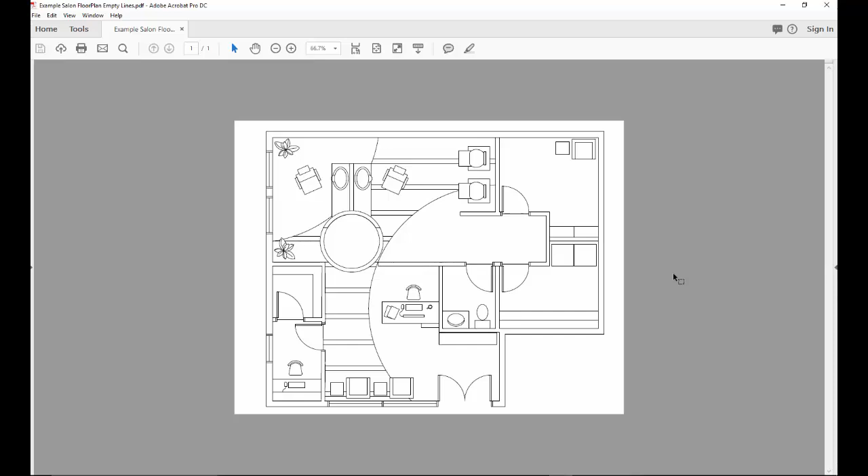Don't include any room names in this floor plan. We're going to do that using the text command in Photoshop. So basically you want something very similar to this, very blank but still with lots of information and accessories and everything I just talked about earlier.

Now step 2 is going to be to go ahead and open this up in Photoshop. So I'm going to click exit here, and here I'm in Photoshop already. So I go to File, Open, find the PDF that I want to open, and click Open. And in this box, the only thing I want to make sure is where it says Crop To under the page options, that it is selected to Media Box. I think it defaults to Bounding Box.

And what Bounding Box does is it crops right next to the line work. So there's no space outside of the floor plan, and we actually want to have a little bit of space out there. So we're just going to go ahead and use Media Box and hit OK. Now if your Photoshop is like my Photoshop, for whatever reason it decides to rotate the image. It's so annoying. So how I fix this is I'm going to go up to Image, Image Rotation, and in this particular instance I just need to do a 90-degree counterclockwise rotation. And what's nice is that it will rotate the canvas as well as the image.

Now you're probably thinking to yourself, well, what the heck is going on? This is really crazy. Why is there black and white checkered happening on my screen? So that means that the background is transparent. Anytime that you bring in a PDF into Photoshop, it's pretty much going to do this. But I do want to point out that over in the Layers panel, this is the only layer here. It actually consists of all the line work. So I'm going to go ahead and rename that Floor Plan Outline. You can name it Floor Plan Line Work, whatever works for you. That's just going to help me remember this.

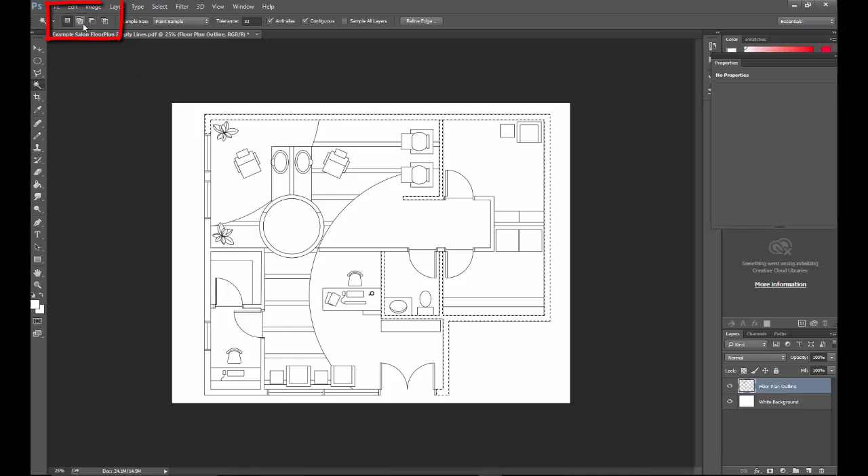And I can add selections by holding Shift while I click. You can also come up here to the very top in the options bar and select the little button that says add to selection, but I'm a Shift clicker, so that's the way I'm going to do it. So hold Shift, click inside. Now for some reason I accidentally click on a line. Let's see if I can get it to do it. It's going to kind of think and then all of a sudden it hits everything. I don't want that, so just hit Control Z if that happens and you're still right back to where you were.

Just make sure that you hit every single interior wall, and I know that I got a little guy right here that I gotta get, and these are walls right here. Here's a wall, and that's a wall. Just double checking, making sure I got all the walls selected. Oh, there's a little guy right there. I think we're looking good.

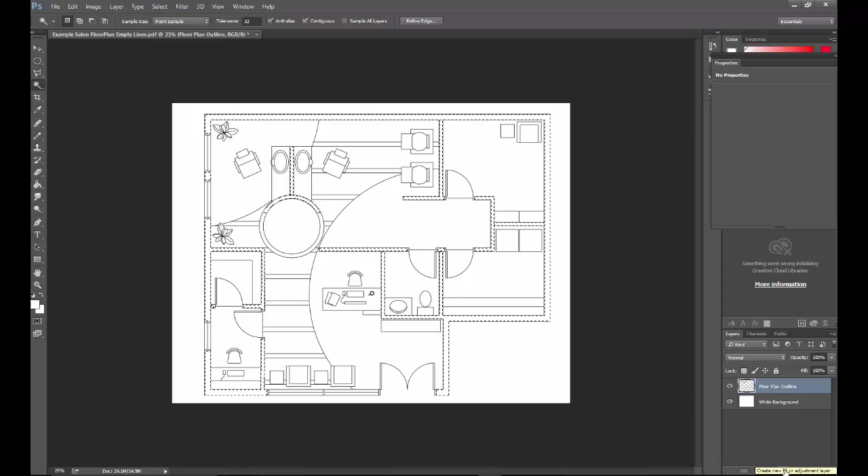Now once all the inside of the walls are highlighted with marching ants, I'm going to come down to this little button over in the layers panel. To me it looks like a chocolate dipped cookie, Oreo cookie or something like that. I usually call it the Oreo. But this is the new adjustment layer, and what I want to do is I want to click on that and I want to go to where it says solid color. It's going to bring the color picker up, and I want black. And I know it's going to be fully black if the RGB formula is all zeros.

Click OK, and you'll notice it previewed it for me while I was in there, but now you can see that it has actually filled all the walls with black. Now you can do that with AutoCAD automatically, but in case you forget to do that, you can still do it in Photoshop. Now notice that over in your layers panel, it gave me a new layer and it says Color Fill 1. There's two icons.

The first one is the color thumbnail, and so that, if I double click inside of it, will allow me to go back and change the color of my walls if I want to, like blue. But really I do want them to be black, so this was just demonstration. So again, 0 0 0 for the RGB formula. Click OK. The other one is actually the layer mask, so it's showing you how the adjustment layer is hiding parts of things and filling the other parts. So we'll come back to this area here in just a little bit.

I do want to rename this adjustment layer. I'm going to call it the wall fill. Again, if you aren't labeling your layers, you're going to be in a world of hurt here in a little bit when you've got like 1,500 layers going on. So make sure you're labeling all your layers, please.

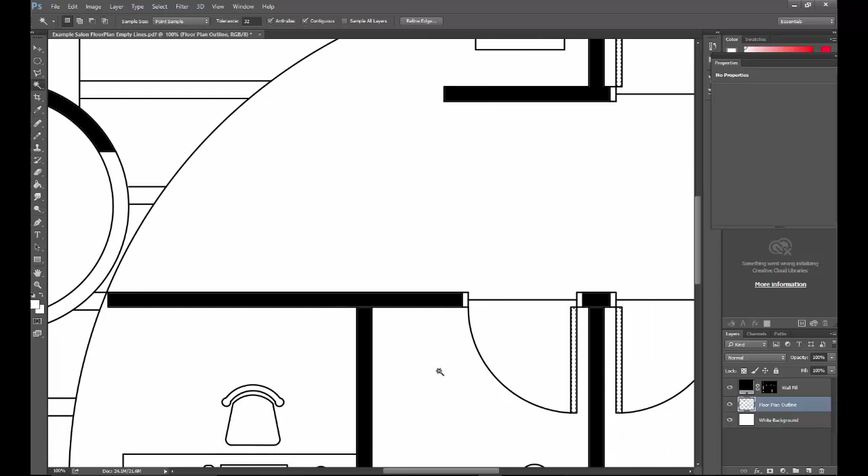Come down here to the entrance doors. Now you could choose brown, you could choose black, you could do different colors for doors. You just have to do different layer adjustments for them. And then I think I just have these two doors left. There we go. I'm going to zoom out just to double check and make sure that I got all of the door thicknesses. It looks like I did.

I'm going to hit the adjustment layer, solid color. I'm going to make sure black is chosen and that we've got 3 zeros. Hit OK. And all of my doors are now black. I have to repeat this one more time for the frames, and well, actually 2 more times. I have the frames and then I also have windows.

Now when you do windows, you don't want to do those black because you need to be able to see that there's windows. I suggest doing it whatever color that the sill of those windows are going to be. So sometimes they're cream, sometimes they're silver for metal. Sometimes I like to pick like a light blue just because psychologically we consider blue like glass. So I usually do like a bluish gray.

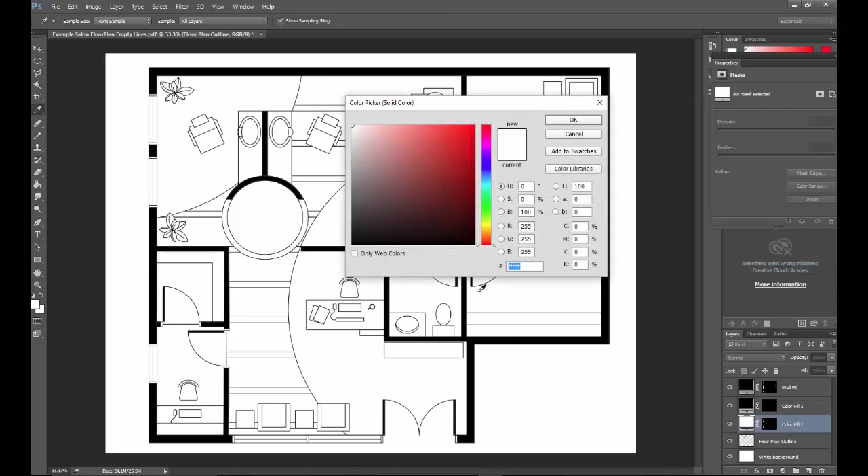So again, floor plan outline needs to be highlighted in layers. Magic wand, Ooh Ah Pixie Dust. Let's do the windows first. I'm holding shift while I'm selecting both sides of the window. And I don't have many windows in this particular one. Then it's time for the adjustment layer, solid color. And this time I'm going to pick kind of a dusty blue kind of color. Whoa. There we go, something like that. And now I have my windows, slightly blue.

Oh, I haven't been naming my layers. Shame upon me. Shame, shame. So I'm going to name this window fill. And this one above was the door fill. There we go.

And then last but not least, I want to make sure that I get the frames done, and I'm going to do those a darker gray. So again, floor plan outline highlighted. Take the magic wand, and then I have to go through all of these with my Ooh Ah Pixie Dust Magic Wand and highlight all of these.

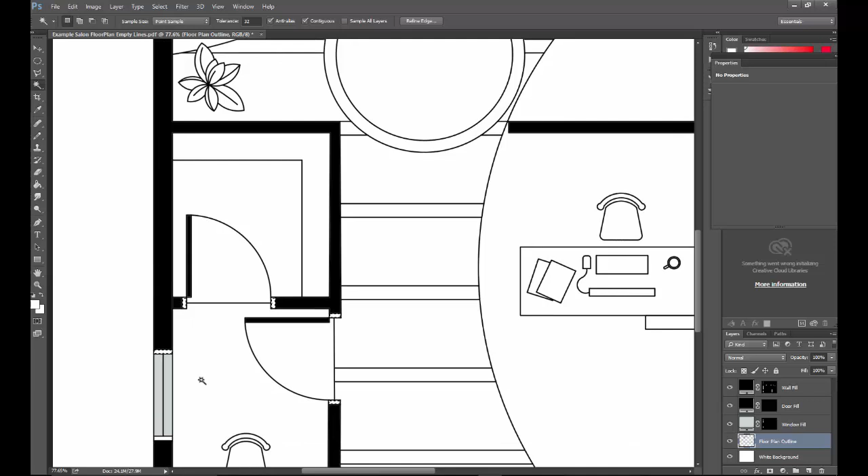It is my philosophy that there should never be an empty, blank, white anything on your floor plans. The reason why is because it makes it look unfinished, and clients don't like to see anything unfinished because then they're going to think that you aren't going to finish things. So everything you draw and everything you touch reflects back on you. So as a designer, you want to make sure that things look finished and polished at all times, and never leave anything white or blank. Even toilets get color. Even if they're white, they still get color.

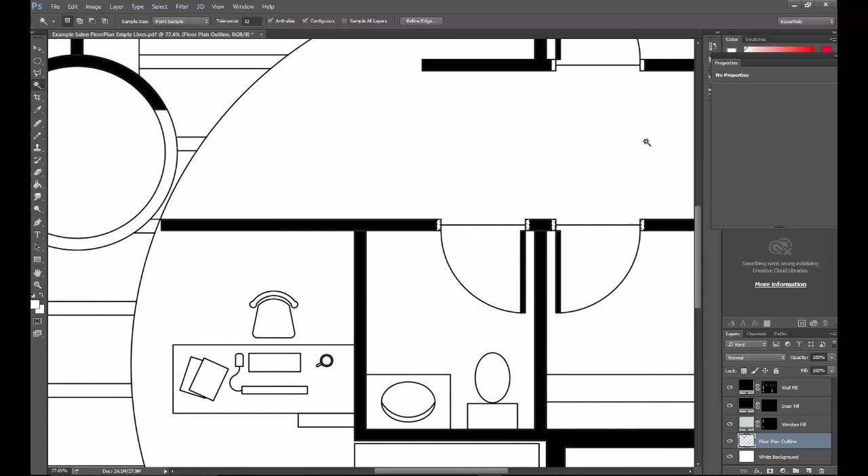So up here in the frame, la la la. Okay, I'm pretty sure I got all of the frames. I hit the Oreo cookie, go up to solid color. I'm going to do a darker gray, so something kind of a little bit more like this. I still want to be able to see it in my floor plan, and I just kind of have to play around. Well, that looks pretty good. I can still kind of differentiate between the frame, the wall, and the window.

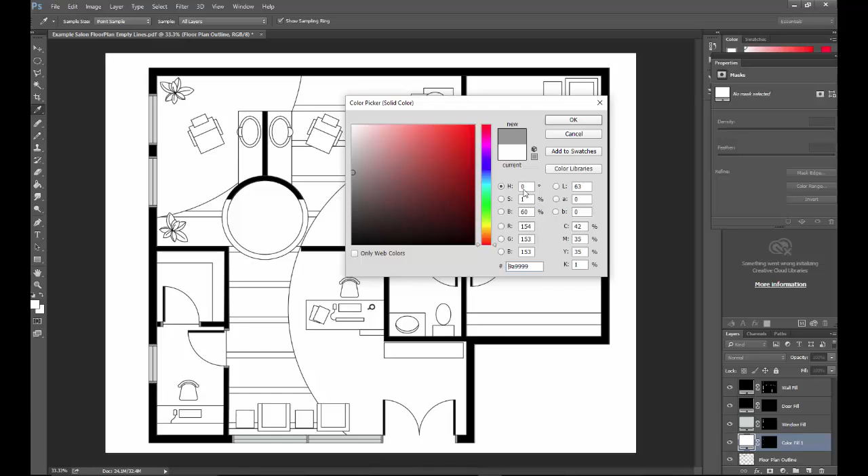Click OK. Come down here to my layer. I'm not going to forget this time. And type in frame fill. Hit enter, and we're looking good.

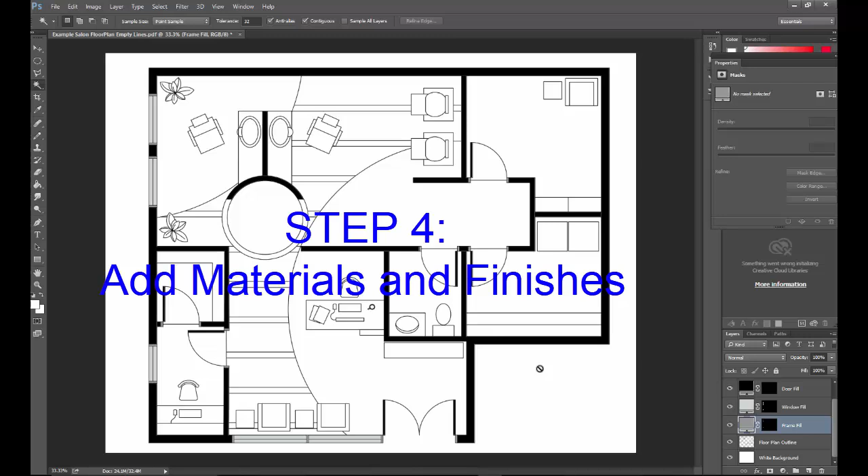So believe it or not, we are already at step 4, and this is where we're going to make finish and material patterns for flooring, furniture, and all the accessories. So the first thing that I'm going to need to do is I'm going to need to find some materials that I can turn into a pattern. So I'm going to go to Google.

Come on Google, let's go, there we go. And I'm going to type tileable white marble. Let's go with that first. Tileable, what does that mean? Well, I think with marble I'm probably not going to find a tileable image.

I'm going to go here to the images and let me explain tileable. So Photoshop is going to take a picture and it's going to multiply it. It's going to repeat it several times in order to fill in like we just did with the color. It's just going to do it with a pattern. So if I can find a tileable image, that's going to repeat over and over again, but it's going to transition smoothly between the repeated patterns.

If I don't have a tileable image, that's when you start getting things that look staggered or squared and a little awkward. It doesn't look as realistic. And my other philosophy is we want this to look as realistic as possible. So here you can see lots of images of white marble. And I'm going to click on one. Let's see, let's try this one. I just want to show you.

So here's a watermark. That means that this image is owned by this company and the watermark is permanently on there. Now could we take a clone tool and actually manipulate the picture so that we can get rid of it? Yes, I suppose we could, but that's kind of a jerk move, and actually it's kind of illegal. It's called plagiarism, and we don't go for plagiarism around here. So you can never choose an image that has a watermark on it. You have to find images that don't have those.

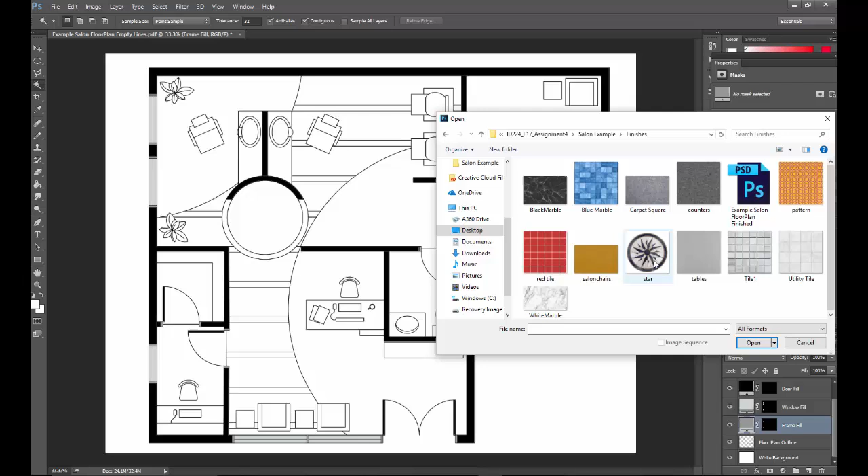And you save it as a JPEG image, and I usually rename them because they have these really long names on some of these JPEGs you find online. So I'm gonna hit cancel. You don't hit cancel, you should hit save if you find a white marble that you like. And I'm gonna minimize Google here for a second. And basically what we have to do is open up that image in Photoshop. So I'm going to go to the finishes, I'm going to open up the white marble, I'm going to click open, and here's the image.

I need to make this a pattern. So I'm going to go up to Edit, Define Pattern. Photoshop's going to be, hey, what do you want to name this? I usually keep it the same name that I named it in the File Explorer. Click OK. And it looks like nothing happened, but actually Photoshop has now saved that as a pattern in its own memory. And once you click OK, you can know that the job was done.

We no longer need this image, so I'm actually going to exit out up here and go back to the floor plan. And I'm going to do the exact same thing that I did before with the walls, windows, doors. I'm going to make sure that floor plan outline is highlighted. I'm going to use my magic wand on all the areas that I want that white marble to show up on. I'm using Shift to select multiple areas. There we go, and I'm just double checking, making sure that I got everything that I wanted to.

And once I do, I go to the Oreo cookie. This time, instead of doing solid color, I'm going to do pattern. And what's kind of cool is Photoshop automatically opens this little window with the very last pattern that you created. Now, as you can see in this picture, it went ahead and inserted the marble, and it looks beautiful at 100% scale. Notice that I can change the scale, so if I want it to be more like 50%, I could.

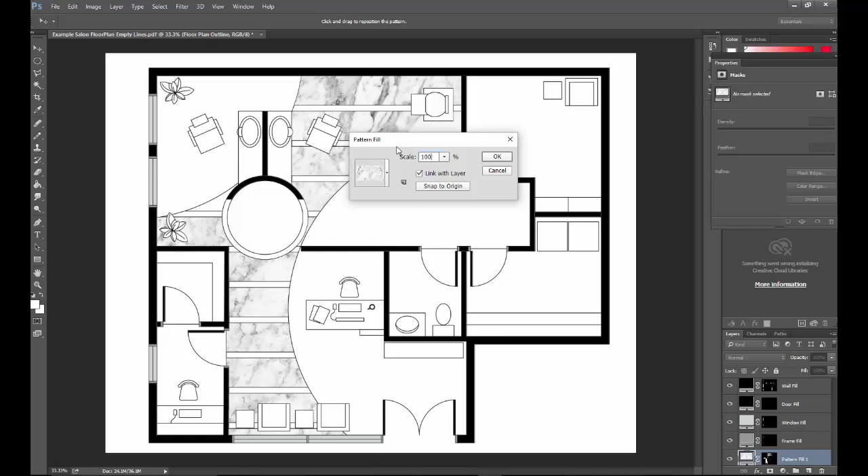And I noticed that I actually missed something, so I'm going to hit cancel real quick. And I'm going to hit shift and add it to. It's really important to make sure that you get everything that you wanted the first time. Otherwise you have to delete the layer and then come back and highlight everything with the magic wand again. So again, Oreo cookie pattern scaled to 100%. That looks beautiful. I'm going to click OK.

So now I have added marble tile to my floor. Pretty groovy, right? Now, just like the solid color, I can come back and double click on this little color icon right here, and I can choose any pattern that I've already made. Now, Photoshop does come with some pre-chosen, but as I start making patterns, you can see that it starts loading into this library. So in fact, if I wanted it to be a different pattern, I could click here, and this might be a really good opportunity to see.

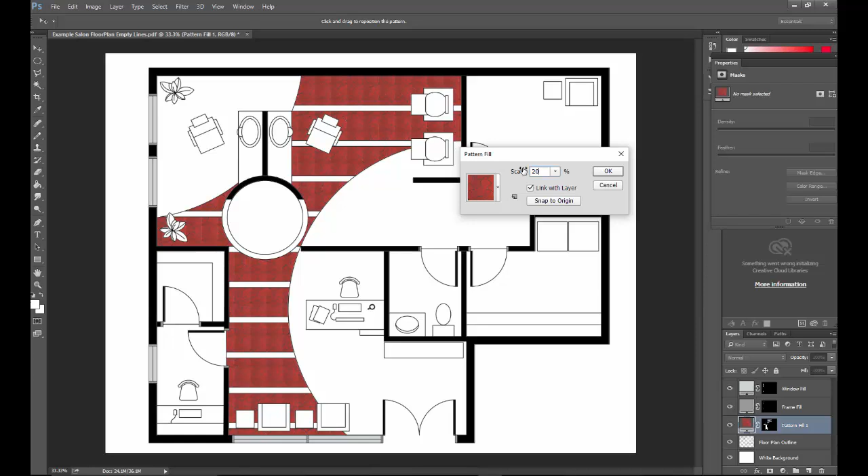This is a scalable tile pattern that I picked. However, you can see that the area that highlights does not match the area with lowlights, and so I get this weird gridded pattern. And I'm gonna make this go down 20%, and here you can see where we're getting like a very definite understanding of what's going on here. The checkered pattern look does not look so realistic. And so I try to avoid images that might have highlights or lowlights in them, or patterns that don't match up to each other, because it does this very same thing that we're looking at right here.

So I'm going to go back to my white marble pattern. Actually, it was this one at 100% because I like that one. And I'm going to click OK. So again, just to demonstrate that one more time, let's put some tile here and here. I've already got the tile uploaded, saved as a pattern, so I'm going to make sure that floor plan outline is highlighted, grab that magic wand tool, and making sure that my marching ants go around everything that I want to. Notice how it's not including the plant or the chair or anything else.

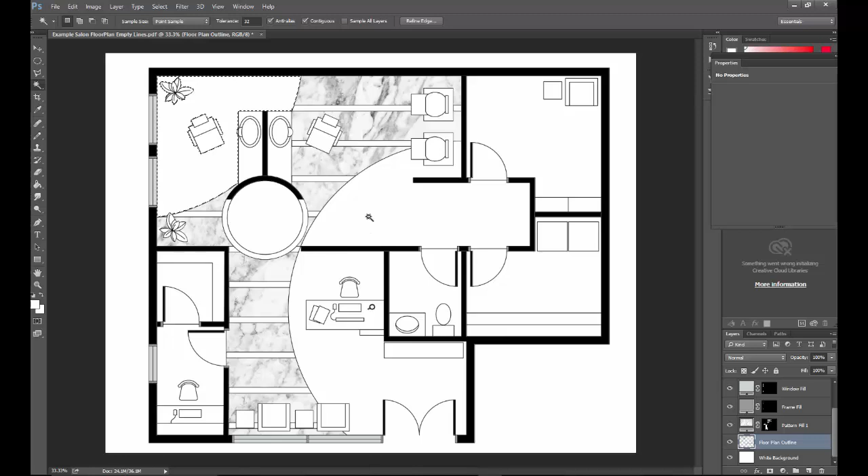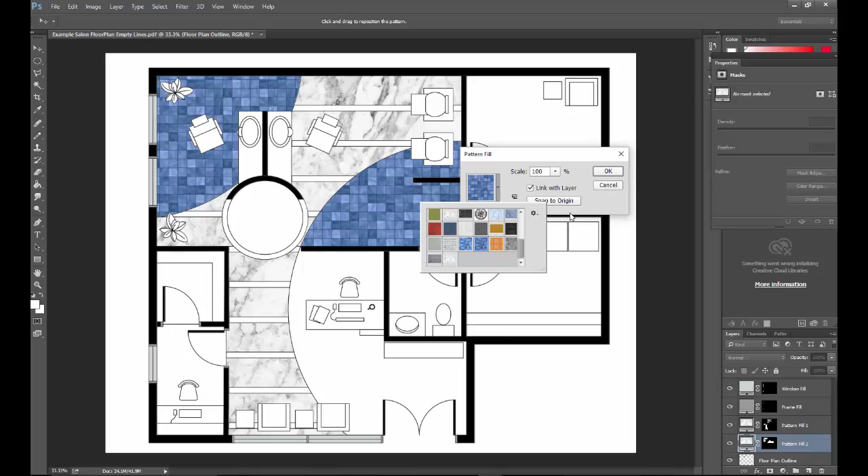Hit shift because I want the same floor material over here. Oreo cookie that stuff, pattern it, and I could do that, but I'm actually going to go and change it to this one right here. I kind of like that look of this very modern, sleek looking thing next to some blue tiles that I found. And maybe I just want to shrink that just a little bit and hit OK.

So continue doing this for the entire floor plan. Again, make sure that everything has color. Even the toilet needs to have some kind of color. Just make it an off-white. Trust me, it's going to look much better if you add something like that to it. Everything gets color or pattern.

Now what I'm going to do is I'm going to show you a finalized floor plan that I did for this particular one. So hang on just a second and it's going to magically pop up. Thanks to the magic of video editing. Voila!

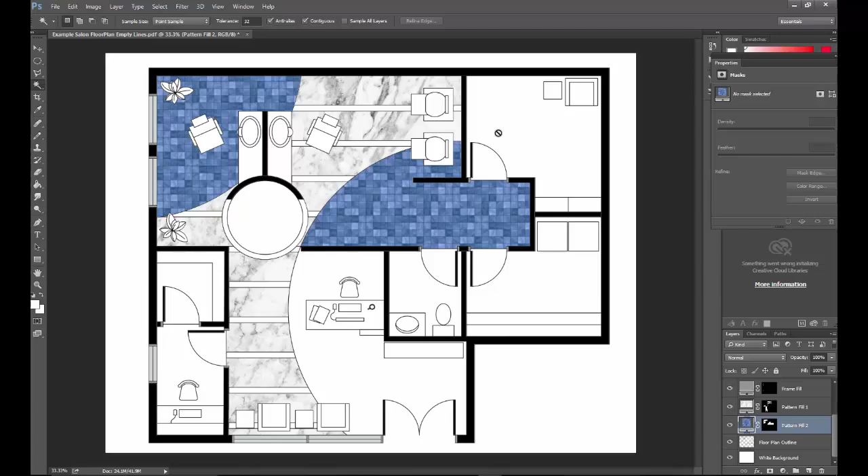So once you finally get to this point, it'll be time to start adding shadows and light to actually render the space. Right now it's just coloring and placing materials, but the true rendering comes when you add light and shadow to things. So in this video you learned how to open a PDF in Photoshop, how to use adjustment layers to add color to things, how to scale materials, how to even download stuff from Google so that you have all kinds of patterns and textures to work with.